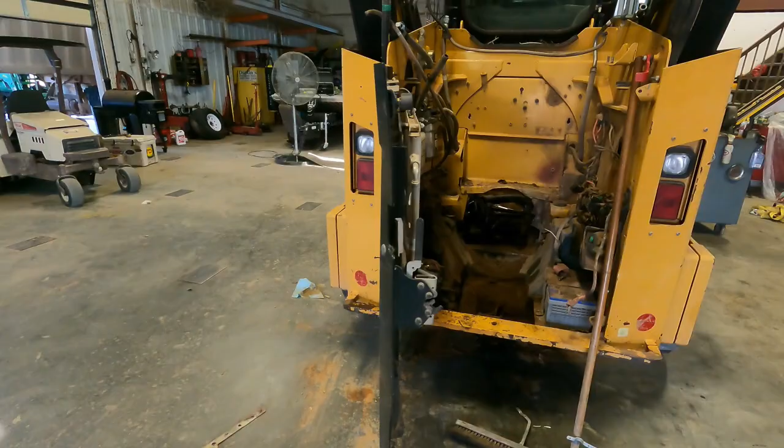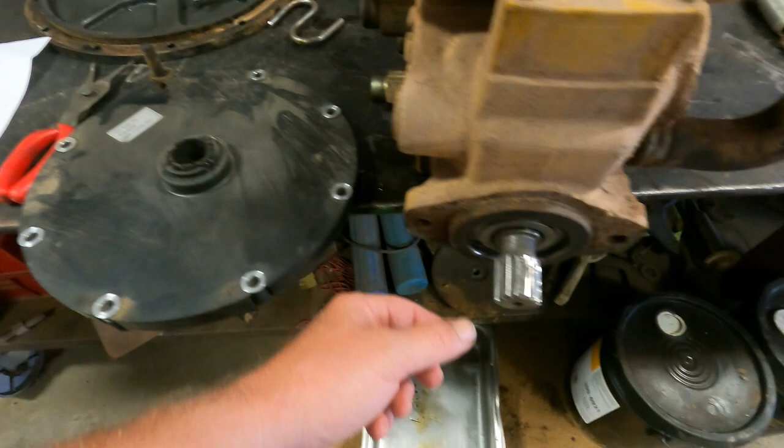So I'm out here in the shop. I guess you can see the video is hydro coupler part 2. I'm out here and we've got it completely tore apart this time. The same shenanigans. Center's broke. This wore quite a bit more than what it was the first time. So we'll just start at the beginning.

Machine breaks, I get it home, order the part, I call him, tell him what it is, the guy finds it, he's like, it's $900, there's a 60 to 75 day national back order. I'm like, I don't remember it being $900 the first time I done it, it was like $200 or $300. So anyways, 2 weeks goes by. Another parts guy calls me, and apparently the first guy ordered the flywheel, not the flex plate. So luckily, that is less than $200, and they had it here in 2 days.

So I bring the machine in and tear it apart, and then see the input shaft like that. And I was thinking about trading it in or selling it, but you can't get nothing out of it until you get it running, because them pumps are so expensive. And I could put a coupler on it, and then somebody in 100 hours is going to break again, and they're right back where I am. So I didn't really want to do that either. So anyway, I tear it apart, get it out, and decide I'm just going to put a pump on it.

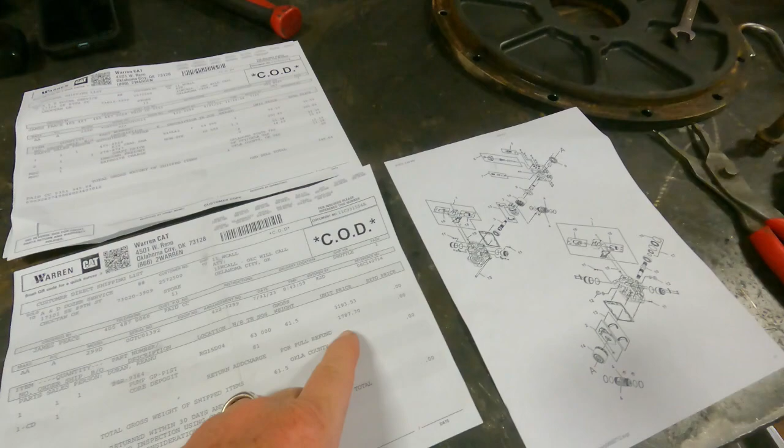Call, they tell me it's $3,200 for the pump. I got it right here. $3,200 for the pump, $1,800 for the core. And I was like, well, how much is the input shaft? And they said the input shaft was like $600. And then I figured the bearings, $400 or whatever, so $1,000. So at that time, it really wasn't worth $2,000 for me to tear this pump apart and try to replace it and then put it all back together and something not work.

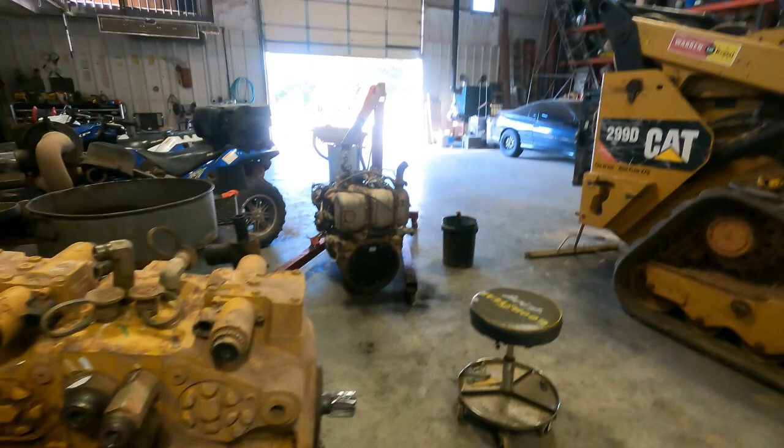Because I thought this pump is considered all one piece. Like this shaft would run all the way through it and all the way to the back, because of the way it looks like it goes in there. And I was assuming, and that's what you should not do. So they ordered the pump. This was Friday. Today's Tuesday. So it comes in today. I go up there to pick it up. Well, that $3,200 buys you from here to here, this pump.

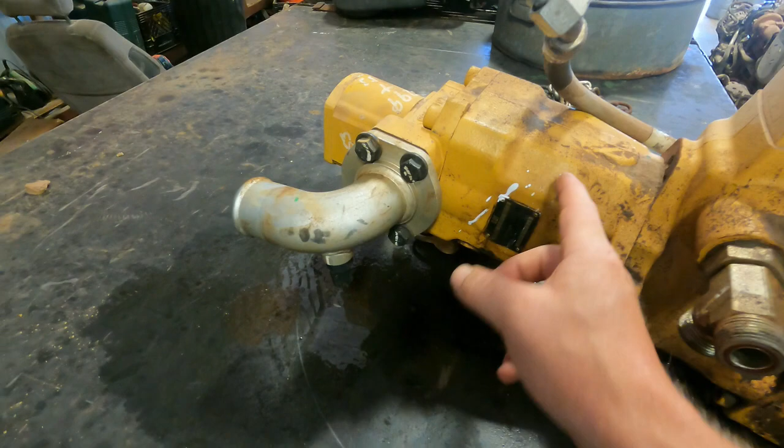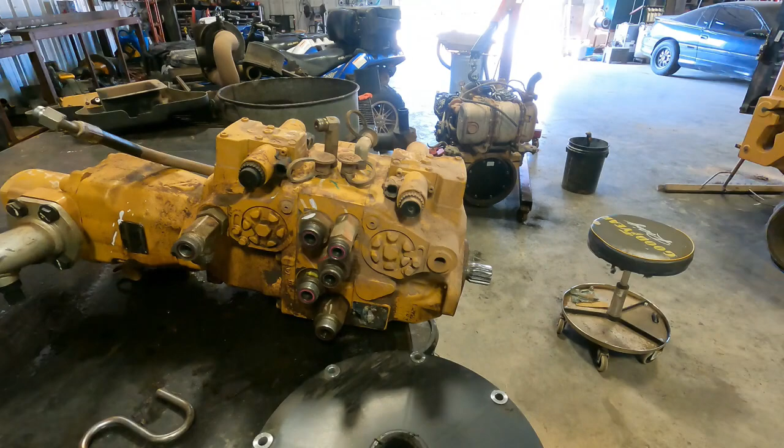So this is actually called the piston pump, and this one's called the hydrostat pump. So refund my money on that. Well, the front pump is like $6,500 with a $3,000 core. And I'm like, you know what? Give me a breakdown of this pump and let's see how far the shaft goes. So then he gives me this breakdown. Hopefully you can see a bunch of this.

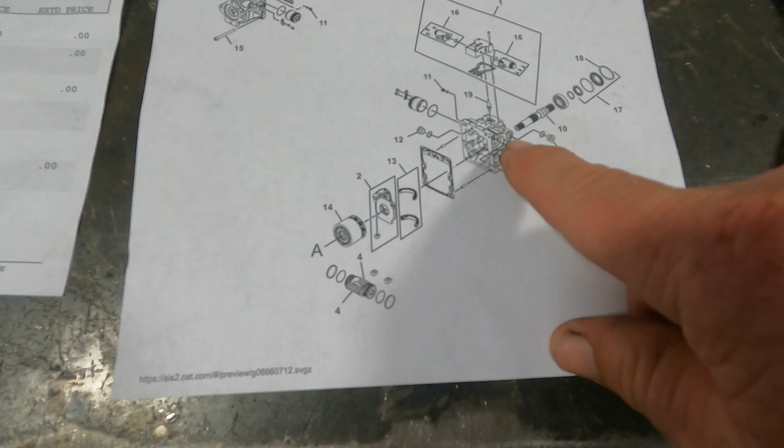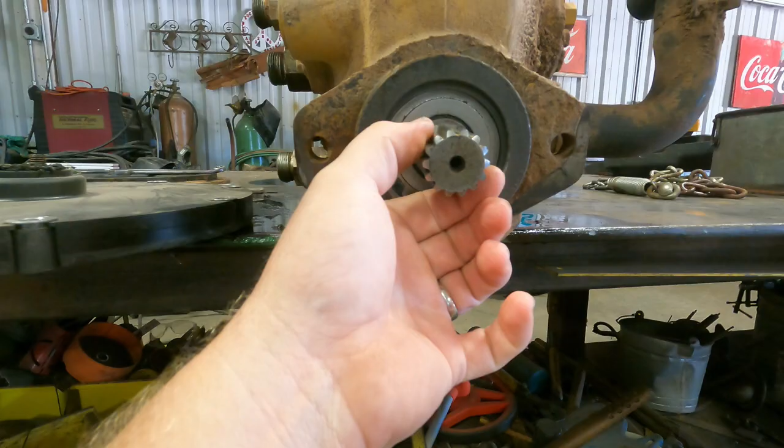So this is the snap ring, seal, spacer probably, I don't know what that is. Another seal, set of bearings, and then there's your input shaft. And then the input shaft runs through this first block, set of gaskets, another set of bearings. I forget what he calls this, but this may or may not have a clip in it, I'm hoping, and another set of bearings. So what I'm hoping is I can pull this snap ring out and this input shaft will slide out. Kind of like a camshaft or something, but I don't know.

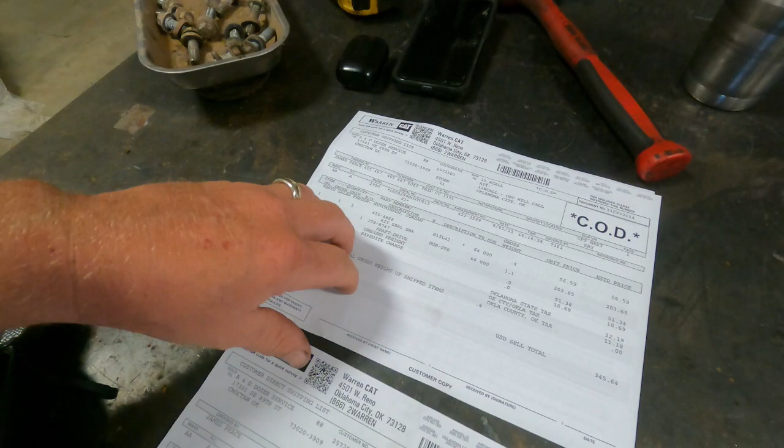We're fixing to see. Worst case scenario, it's still going to be a core if I can't get it out of there. But the input shaft is $203, and the seal kit number 17 was 60 bucks, so $345. So I'm gonna go ahead and take this apart and see if I can get it.

Now, the other reason I'm making this video is the whole reason this even started, because I was pretty disappointed in this whole plastic flywheel, not getting that many hours out of it. The first time I didn't have the bell housing off of it, right? So that parts guy that figured out that they sold me the wrong deal, I think he was a mechanic, because he knew exactly what I was talking about, and he kept saying, you got to take them 2 bolts out to get that pump out of there. You don't have to take them 12 bolts out of that bell housing.

I'm like, I don't know what 2 bolts you're talking about. Well, you can't see them. They're right here. And by the time this is in here, you can't get even an extension on it. This side you might be able to, but with all these hoses and everything on here, this side you can't for sure. Like there's no way.

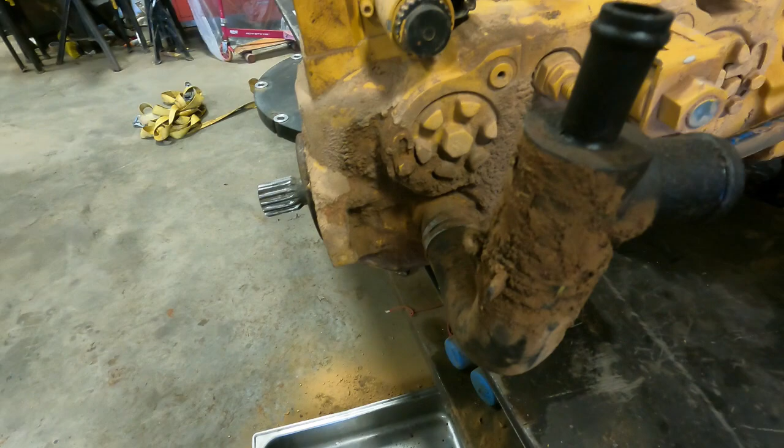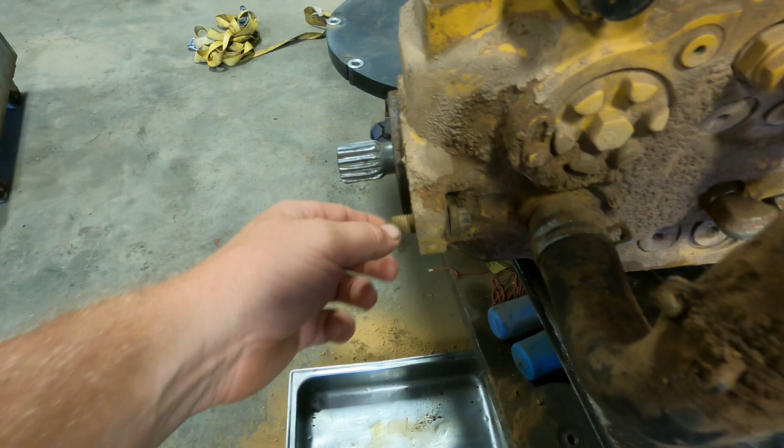They make a special tool that slides down through here and it's got a closed-in crow's foot on it. And these are torqued to 120 foot-pounds. And these right here are torqued to, I think, 50. I think it's like 45 plus 6 or whatever, so I torqued them at 50 and I used Loctite.

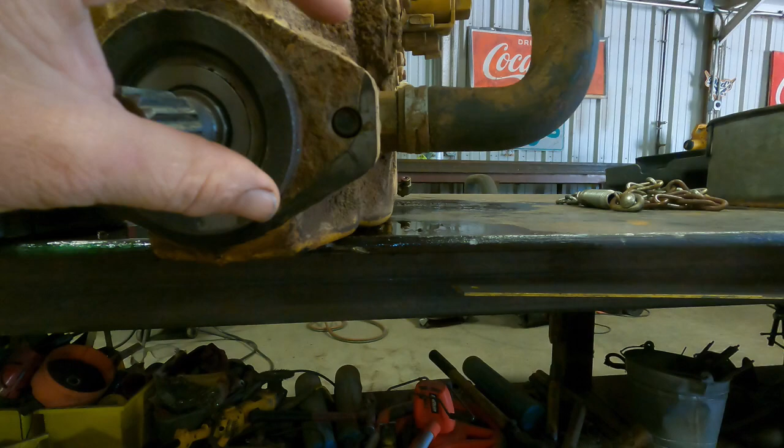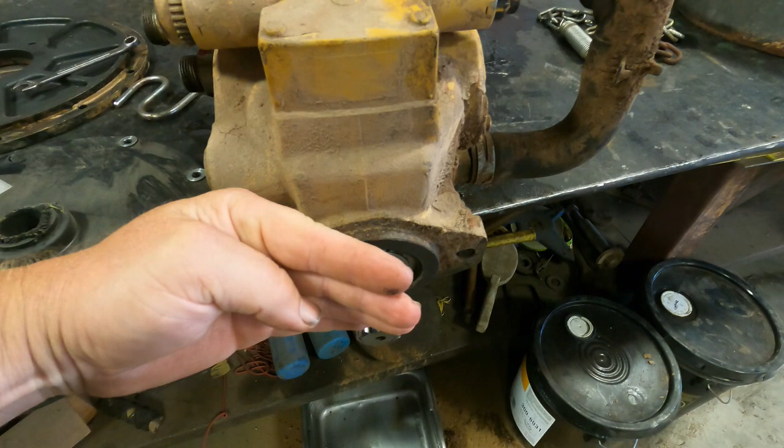But anyways, the piece of that mud flap that goes in between this and the motor, when they did it from the factory, or if they had a pump problem and pulled it, whatever happened, because it was a rental when I bought it, so Cat worked on it until I got it. It had been there that long, and you can see that it's pushed it about 1/8 of an inch out of square, and that's what was wearing these out.

Because that's when the parts guy called me and said that $900 was the flywheel. When we was talking, I think he used to be a mechanic, because he was saying if you don't get them lined up, they won't last no time. And I was thinking, well, maybe them bell housing bolts are loose, because you can't really see them. I didn't look at it. I parked it out back and didn't touch it because I knew the parts wasn't here.

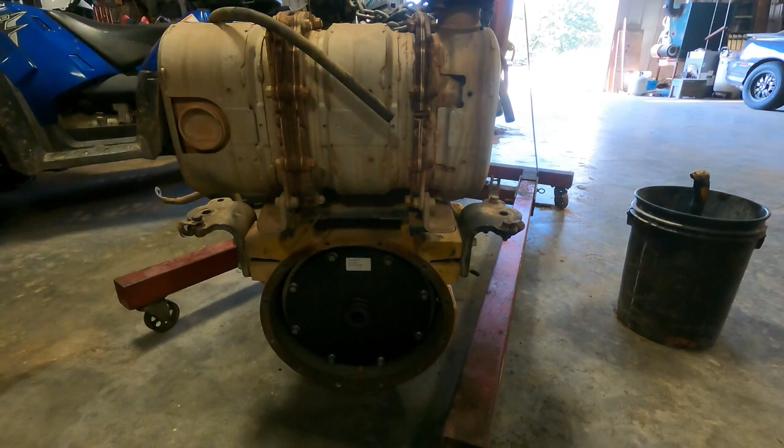So when I took it apart, I made sure there was nothing loose, so that wasn't the case. And a side note, if you do these, that's a machine press fit bell housing that goes up in here. And I didn't catch it, but when that fell down last time and got dirt all in it, I didn't clean it out. And I like to never got these things apart this time. I even went back and watched the video, because I don't remember it being that big of a problem. But this is the bottom, and it's got dirt in it.

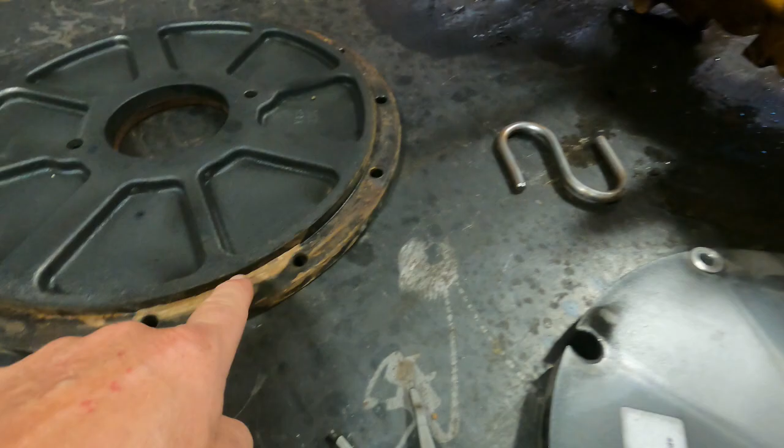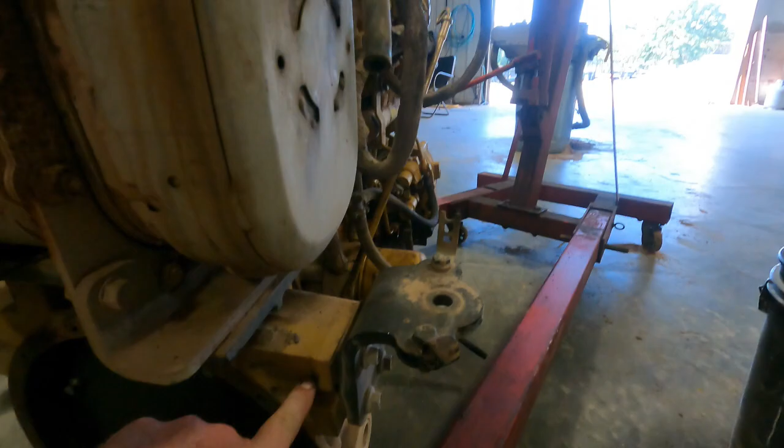So this had dirt in it, and when I matched it up and tightened it up, I had a ratchet strap on the front, and then I brought the tractor in here and had a ratchet strap on the motor trying to pull them apart. And then I had a tire bead breaker tool with like a 4-pound sledgehammer you slide back and forth. So I was putting that on the back of the block right here. Well, the paint's gone, and basically beating on it with a 4-pound hammer. I did that 20-30 times, and it finally cracked loose. So you definitely want to make sure that's clean.

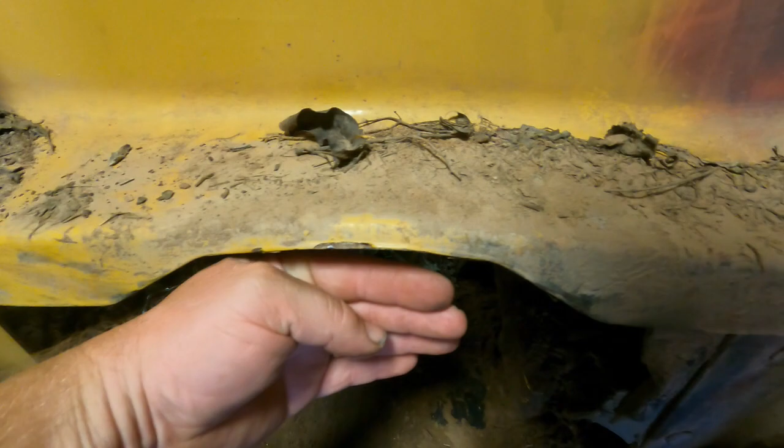But also, if you're taking this apart and your coupler's bad, it's really hard to see because this bell housing is like right here. When you pull the motor out, the bell housing is flush back in here, so you really can't, because this is that piece of rubber that was stuck in there. So it's really hard to see where them 2 bolts go, to make sure that nothing is in between there, or them bolts are loose, because if them bolts are loose, it'll do the same thing. So that's super important.

I don't know if anybody's made any videos on this since I made that one, but I'm going to try to link them together, because if I'd have known that before, I definitely would have checked that and caught it then. I wouldn't be doing this again, especially if all I got to do is snap this ring out, because the pump's not bad. You're talking $6,000 for that pump. If I can get this input shaft out that easy, that's huge. That'd save you a lot of money. So I'm gonna get my snap ring pliers, get all my tools out, and see how hard this comes out.

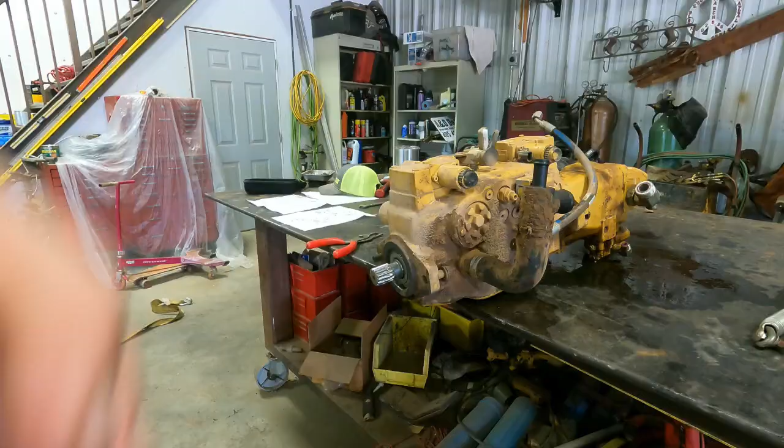Another interesting point is, if this does come out of here, you don't even have to take the pump out of the machine. As long as these bolts are tight and there's nothing in there, you could leave the pump in the machine and do this with just taking the motor out. The other reason I want to make a video on this is I've had quite a few comments asking about torque specs, and if I really thought it was easier to pull the motor than take this pump out. And yes, I'm still not looking forward to putting it back in there.

Gotta go find another tool. So I got my tools here. Because them hoses are gonna be really hard to hook up. I'm not looking forward to trying to do that at all. And the other deal is, I took a siphoning hose and siphoned out all the hydraulic oil I could out of that tank, and I probably still lost 3 or 4 gallons.

Of course, you know it's just not gonna fall out of there. Oh, it's moving. Oh, there it is. I don't believe that. Oh boy. No way. I can't believe it. There you have it, folks.

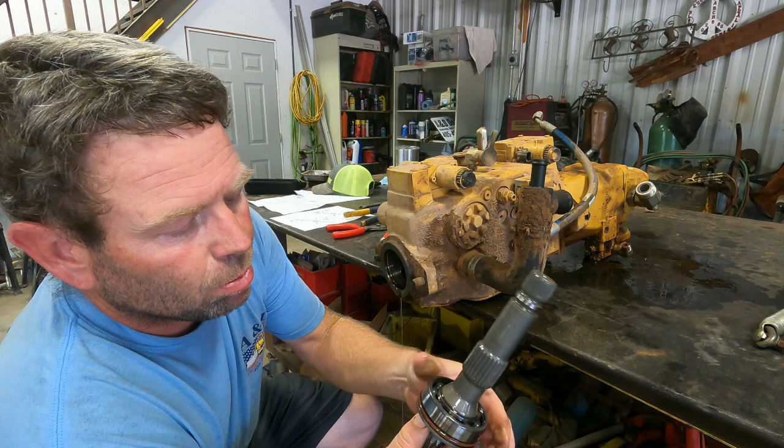I was wondering about this bearing. It is pressed on there though. So I'll probably have to order a bearing. Maybe I can get that off there. So I'll lay all this out and start it back over.

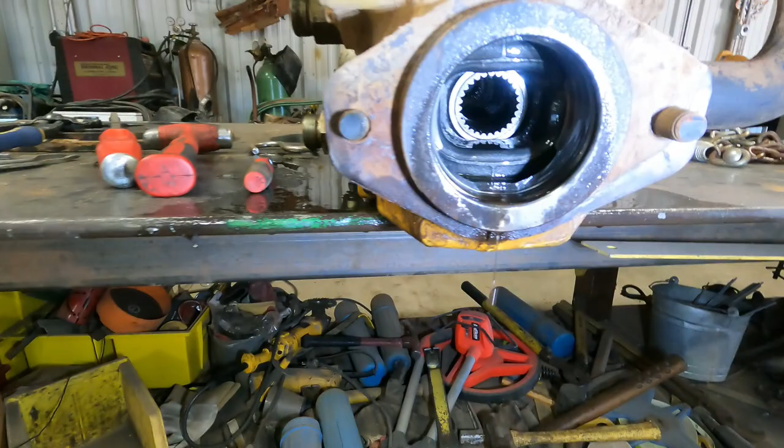Look like something that'd eat you. A largemouth bass with a funky set of teeth. I can't believe that fell out of there like that.

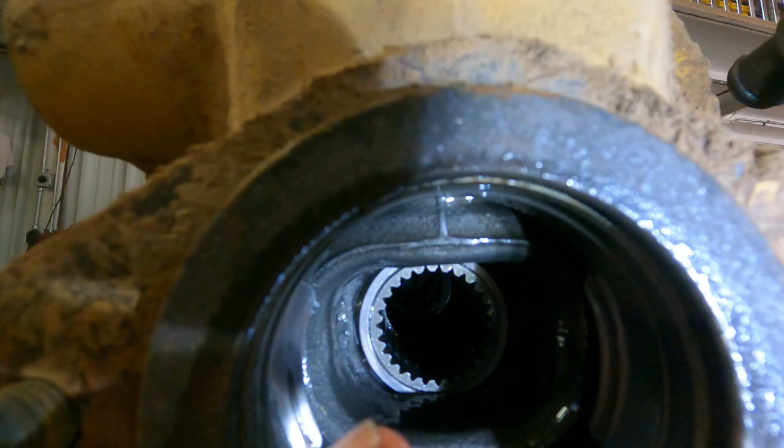I was afraid that was going to be a Timken bearing, but they're ball bearings. And I guess this machine, it's kind of hard to see it, but that little lip right there is what holds it all in there. Man, that's tiny. Whatever you do, don't beat on that.

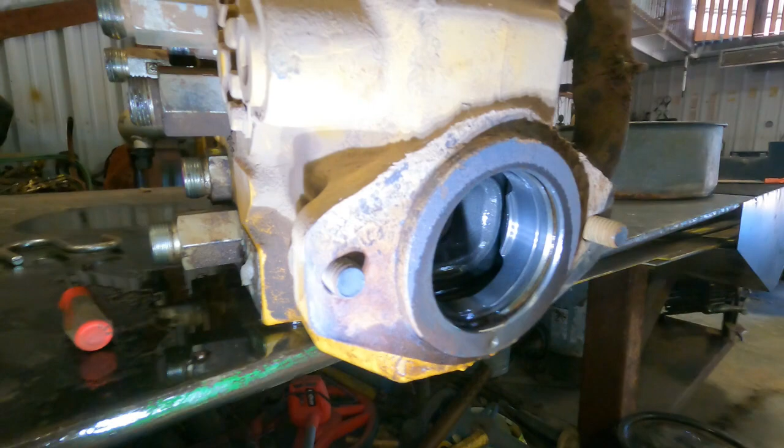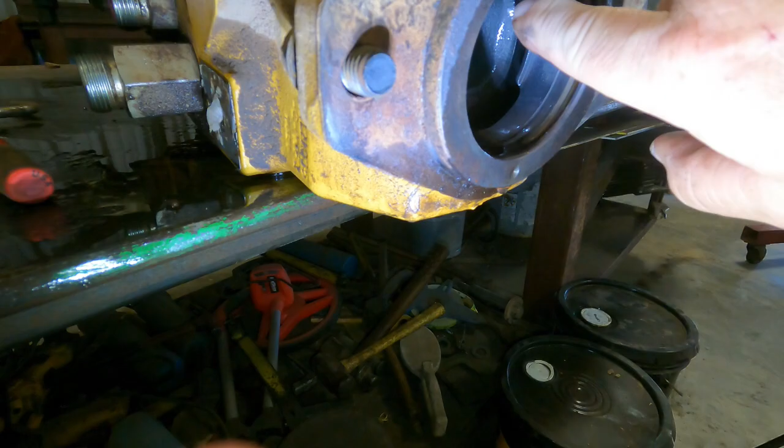Man, that's hard to hold all this at the same time. It rides on this right here. Maybe it bottoms out in there too. I really hope it does, but man, that is so small. All right, dodged a bullet. Like a $6,500 one. So this is it.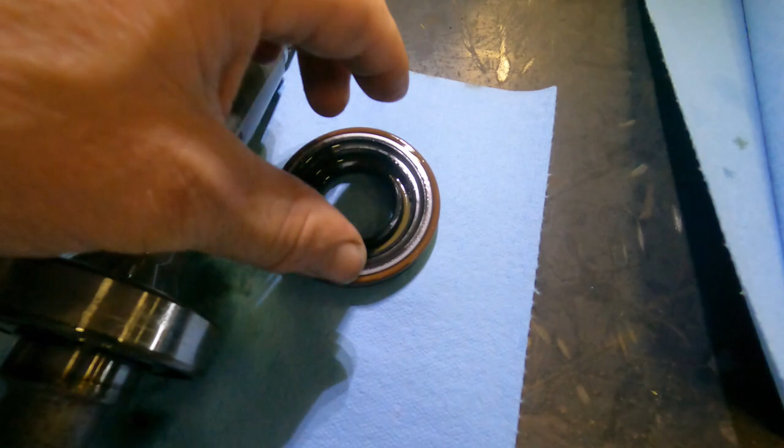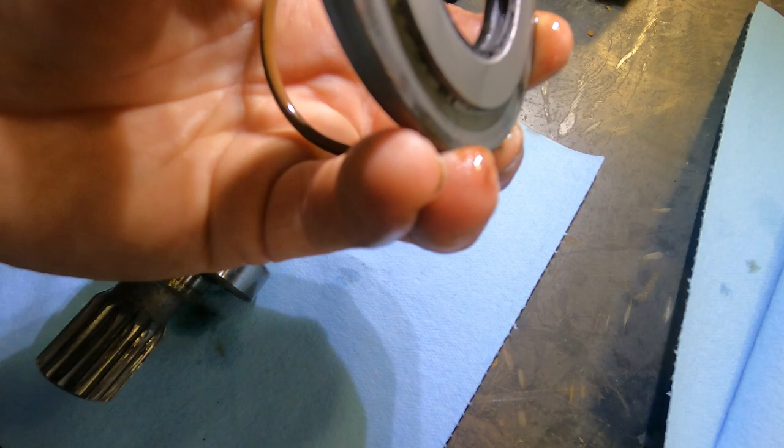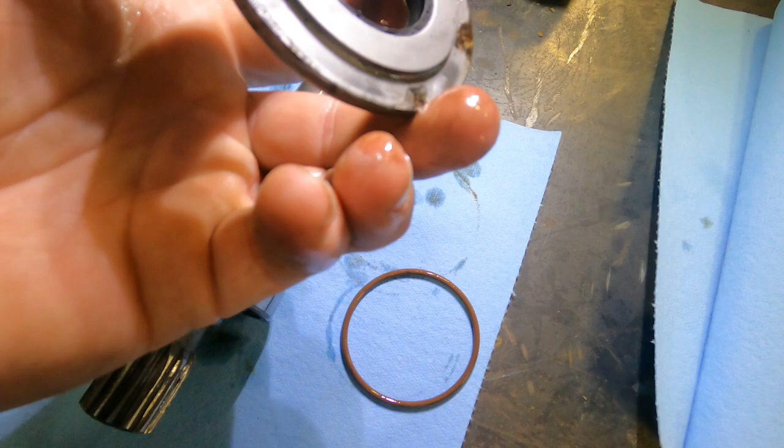So I'm not gonna take any of this apart until I get the rest of my seal kit. That way I put everything back together like it was. You know, it's real easy to look at now, but this comes out, that's backwards, I think. Normally, like a wheel bearing seal, this would go out that way, but yeah. Or maybe this is part of the kit.

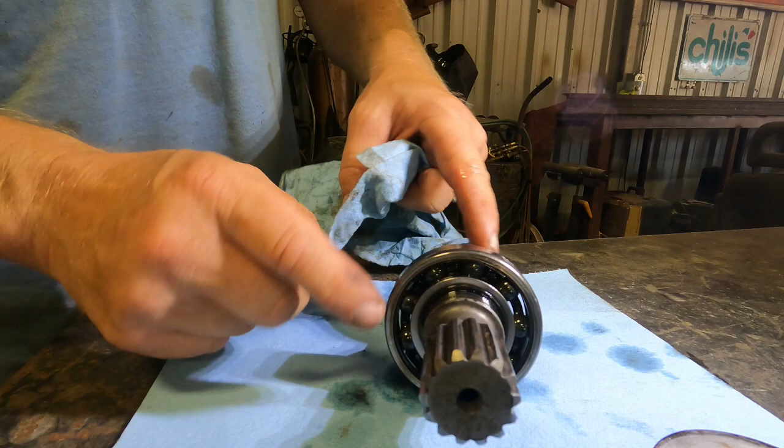So these are just ball bearings, and it's not even pressed on. It's got another clip. I was afraid this was going to be like a set of Timken bearings, and the race would be inside the pump, and this whole thing wouldn't come out, and maybe this end was bigger and it wouldn't fit through there. But it looks like I dodged a serious bullet, because that's what that clip is right there.

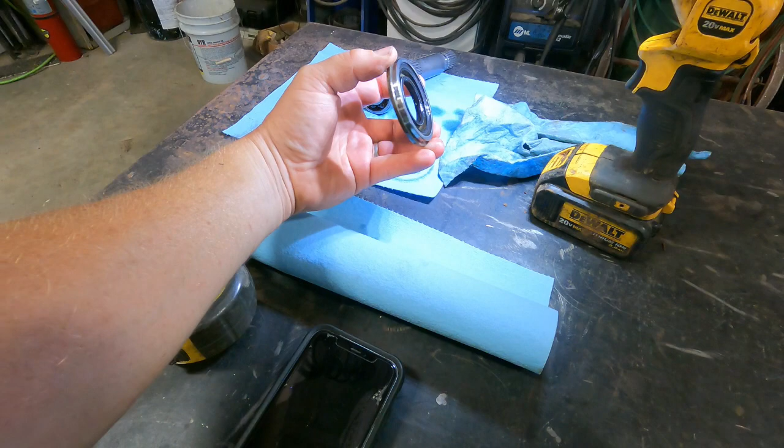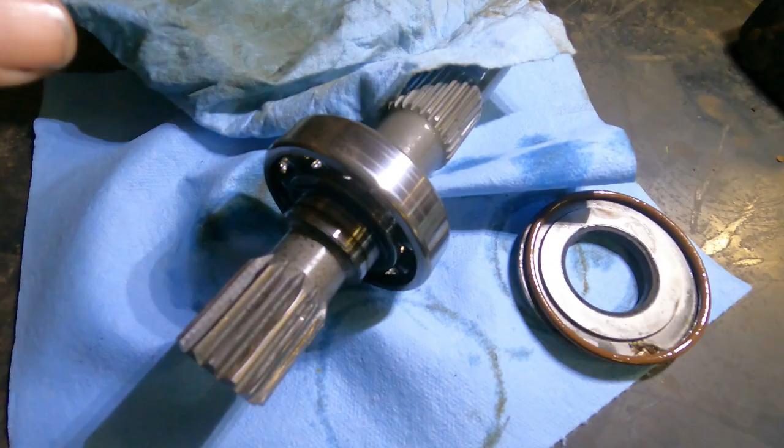And I seen that. And so basically, this whole thing is all going to be new. That kit, that $60 kit, I don't even have to drive nothing out. I get that, this, and new bearing, new clip. So I'll get all them pieces new for 60 bucks. So that's sweet. The bearing looks fine. I can't believe I don't have a race in there, because what would keep that from spinning?

So anyways, I'll wait till the parts, they're supposed to overnight them. I should have them tomorrow. And then I'm going to put it back together and see if I notice anything else before I put this video out. But I'll put it all back together, bolt the bell housing up, get it mated up to the motor, and then stab it back in there.

But one thing I did forget is that rubber mud flap deal in there. It is hard. It's a pain, and it has some bolts. The first time I did it, I didn't see how they ever got it in and out of there, but that's how the factory does it. They undo them 2 bolts, the bell housing comes out with the motor, and that flap is in between the bell housing and the front of that pump. And I'm assuming they do it for heat and probably noise.

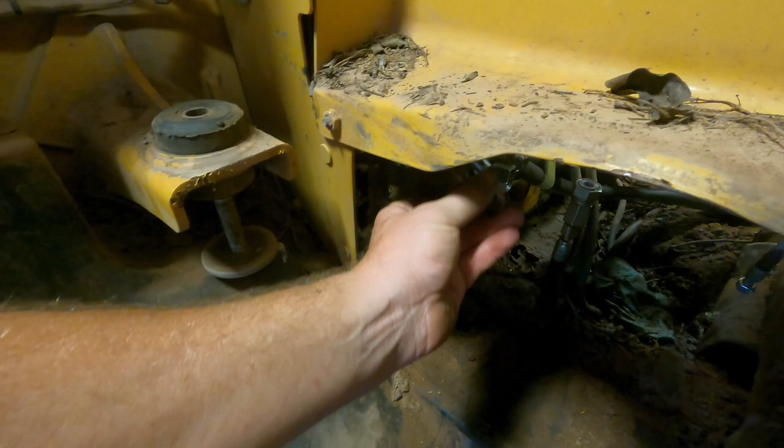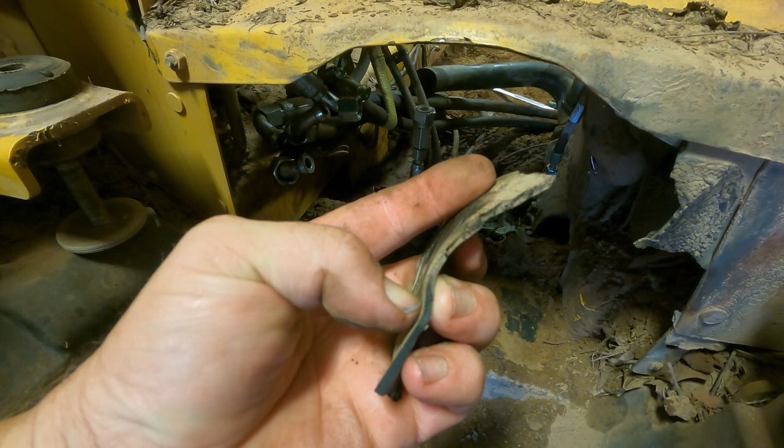Because this is one side of the bracket that I took off, and it goes right here, and it's literally a mud flap. That's all it is. It's a little old mud flap. 3/16, 1/8 inch, whatever it is. But if you don't have that special tool, you won't be putting it back in there, I promise you. Because it's just too many headaches. So we'll see if we get our parts tomorrow. And like I say, we dodged a bullet on this one.

And if you don't know, you should check rental prices. I about fell over when this broke. I was out on a job. I had to rent a machine. It was like $650 for 1 day for a 289. I thought it was $200 or $300.

So keep that in mind on your pricing and whatnot. That was a real eye opener for me. You tell these people, they want you to come out there and do a job. They want you to drive to their house, load the machine up, leave your house, go to theirs, unload it, work for 2 hours, and they expect to pay a couple $100. Like, you know what? Go rent a machine, you go pick it up, take it and use it, you know what I mean. And then you get to work on them on top of that. So, anyways, I'll get everything cleaned up, and when the parts come in tomorrow, I'll put it all back together, and we'll see how it goes.

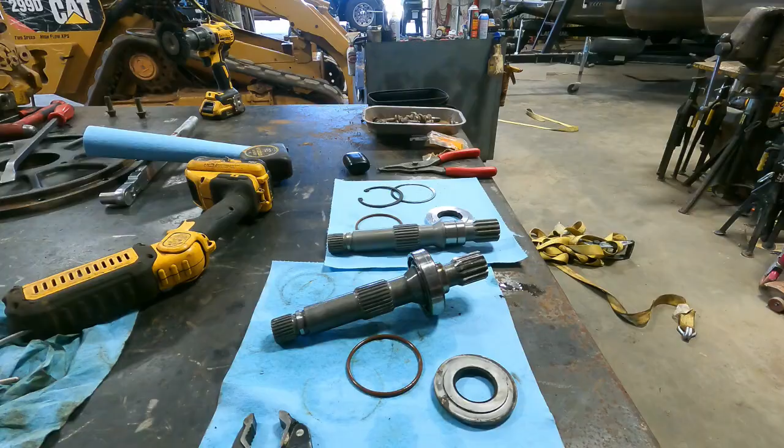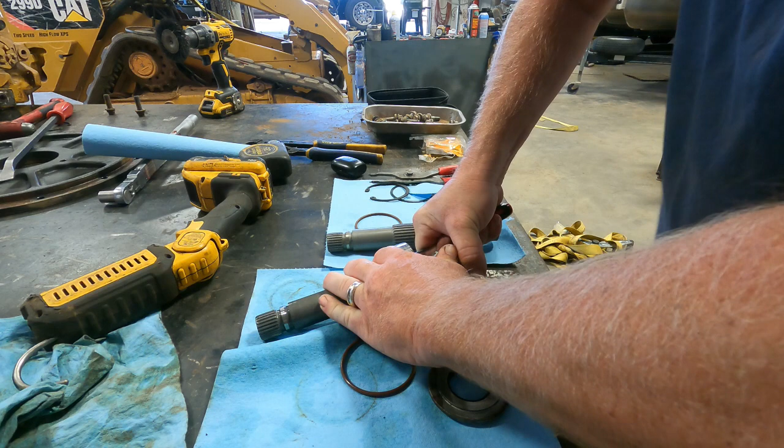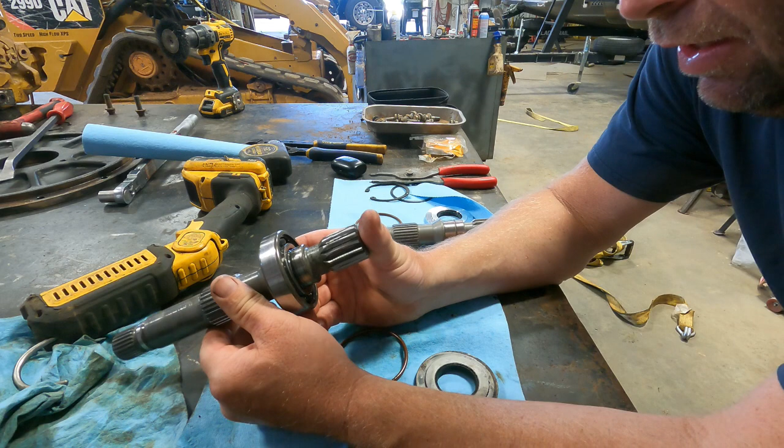So I got my parts back. It's like 1 o'clock, 12:30, something like that. It looks like this is going to be just super easy. Hopefully. Probably the wrong size pliers. Oh, it is pressed on there. Now I wish I'd have bought the bearing. Well, it is pressed on there, so I'm gonna put it in a vise and see how tight it is.

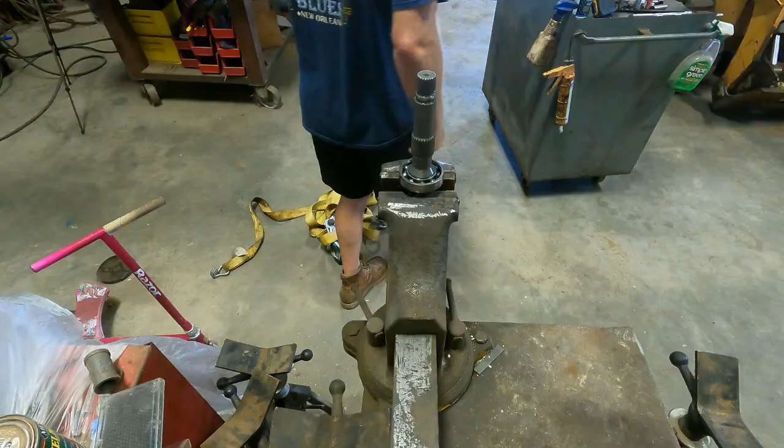So this is a dull chisel. I got it in the vise. I'm gonna start off. I'm just barely hitting it, it's moving, so it's not a super tight tolerance. Usually 2 to 3 thousandths on a press fit. And it's coming right off.

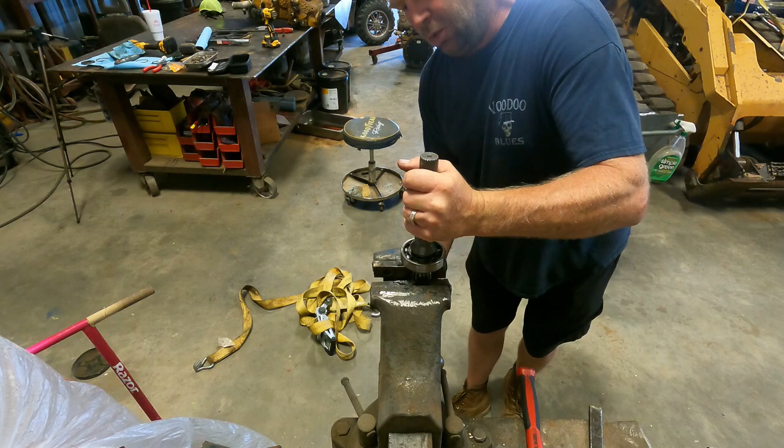I might be able to use a socket or a punch. The splines are already messed up, so I'm just going to clamp it on there. This ain't going to matter. If I wasn't recording, I'd just put it on the table. It's just a little hammer. I'm not wailing on it. And I did mark the bearing with some paint, so I know kind of which way it goes back on here. Just like this. A little oil on it.

That's probably not the best. I'll get a socket real quick and then put it back in there. All right, so I cleaned it up. It felt like I had a bad spot in it. There's a piece of trash. I thought I was gonna have to stop, but I cleaned it out with brake cleaner and blowed it out. And now it's fine. So either a piece of this fell down in there or something.

This is a 1.5 inch deep socket. I don't know if it's going to go all the way before I hit the splines. Ooh, that's close. You can probably just use a regular chisel. And you can tell when it's all the way down because of the way it vibrates the hammer back. There's something in there now. You can hear it and feel it. Like a brake cleaner in your eye. There. So all the trash is out of it, we're good to go.

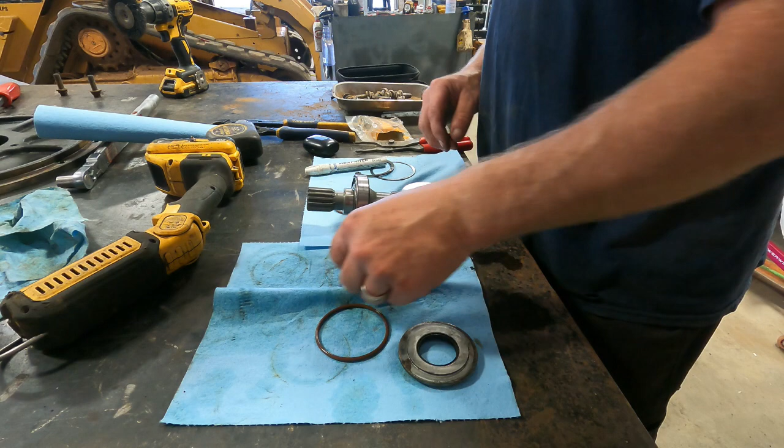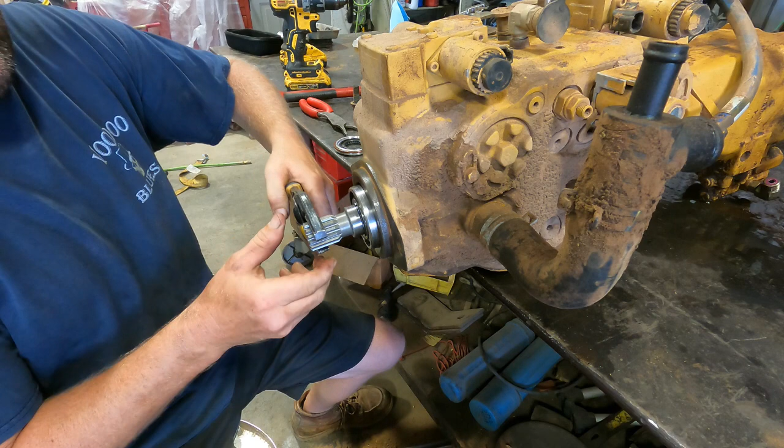That's it. And I'll take a little hydraulic oil and put it around this O-ring and this seal and the inside. It don't get any easier than that. And you don't even have to have a real fancy pair of snap ring pliers to do this job. So I will hand it to the designers on that one.

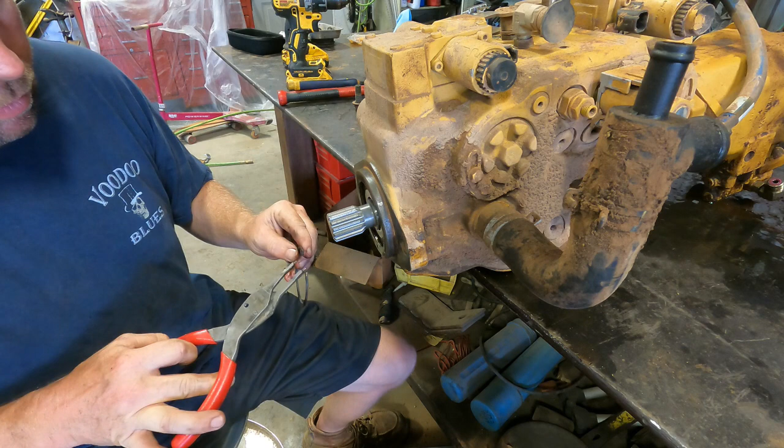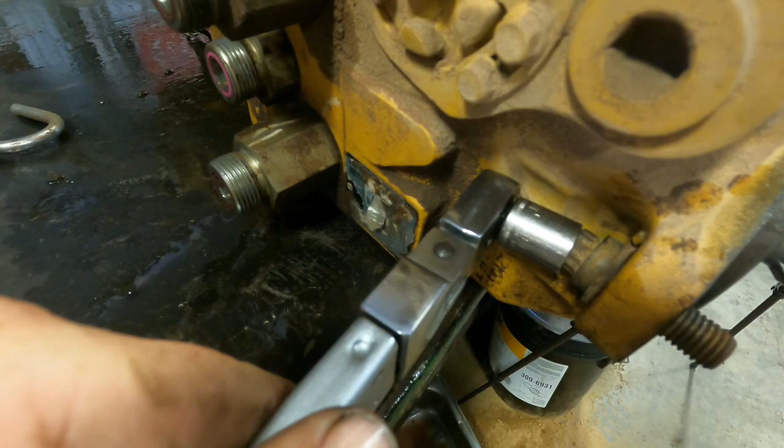I went looking at some skid steers today, and I don't know if I'm gonna keep this or what I'm gonna do. So I cleaned these bolts up, and what I'm gonna do is run Loctite on there. I'm gonna put a wrench on it and beat on it with a 4-pound hammer. Because this right here is a 3/8 drive torque wrench, and you cannot get it on here. Right, so I'll go grab one of them cheap extensions, but I think you'd probably break it at 120 pounds anyways. So anyways, I'm gonna put some Loctite on there, match it up, and beat on it with a hammer, I guess. Sounds like a plan to me.

And then use a wire wheel, and I already cleaned all this up really good. And then I'll do the same to this bell housing and inside there, and match it up, and I'll see how it balances with this hanging off the back of it, and then that'll probably be the end of this video because I'm basically just putting it back together. So we'll see what happens.

So I got it stabbed in there. I had my boy help me do it. It wasn't that bad. It's pretty balanced with the chain towards the exhaust. There's 2 picking eyes on that motor. It would have been easier if I'd have had the little crank screw thing that you can adjust while you're using it, but you know, we're poor, so we just pick a link and go with it. Everything in here went back.

It looks like these hoses aren't going to be that bad. The hardest thing to unhook is back there, and I left this line on there, but the rest of this should go back together pretty easy. Like I say, them bolts in the bell housing, right there's one of them. You can get to this side, but by the time I get all this hooked up, you can't even see that one.

So it's like 3:15, it's like 105 degrees. So I'm just gonna put this thing back together and hopefully get this video out tonight, maybe. We'll come back after I get it running. 3:45, 3:15 when I started. It took me 30 minutes. It's in here. All the lines are hooked up. The only thing I got left to do is some zip ties.

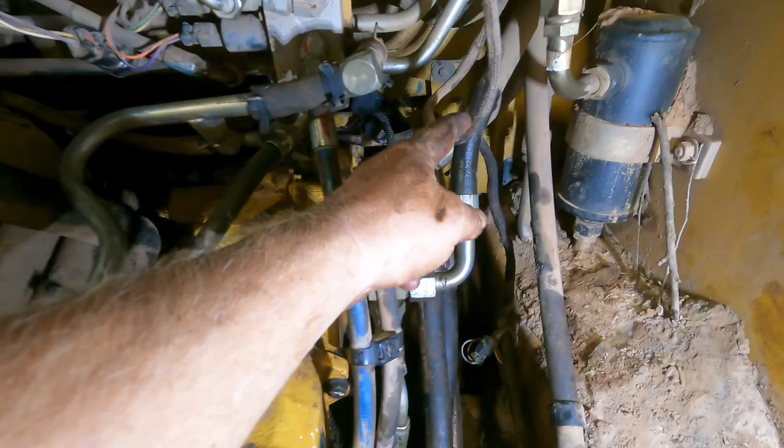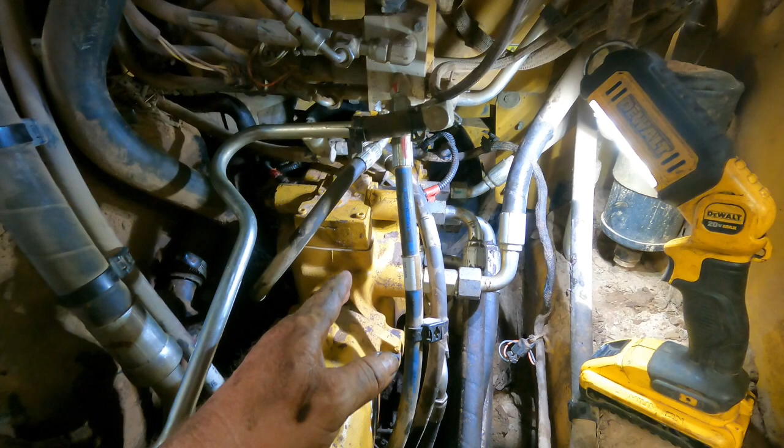I think that's it. Somebody was asking me if they thought it'd be easier to pull the pump out. I still don't, because the balance point is way back in here. On this pump, when we took it out, we put a chain over in here. Can you see? Yeah, right there. So even if you had a cherry picker in here, you couldn't get it down far enough. You'd have to drag it back. I think you'd have a really hard time trying to stab it. If you wanted to manhandle it, I guess you could try. But all these hoses are really in the way.

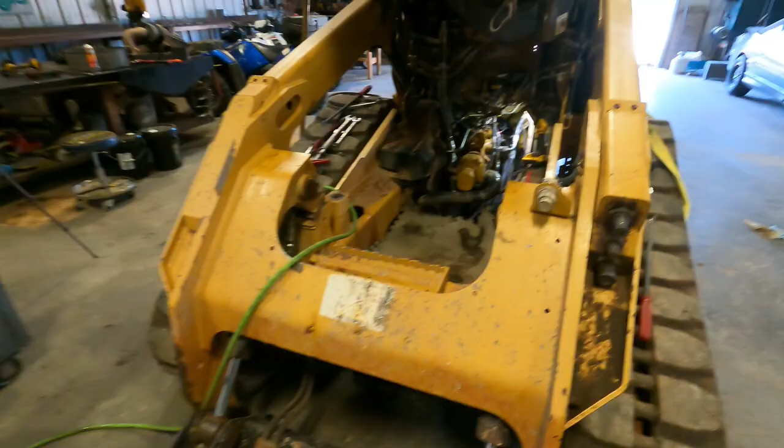But if you knew the pump was bad, I would probably pull it out this way, and before I pulled it, put some lumber or something under there and go that route. But that's it. So probably take me another hour, 2 hours to get everything else back in here and buttoned up. So get back to work.

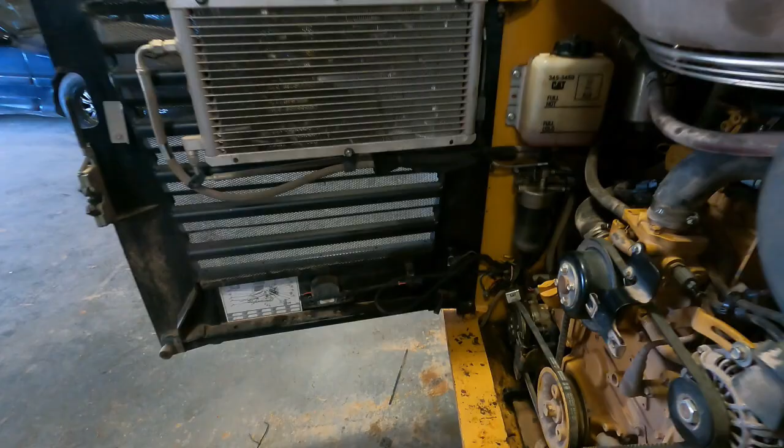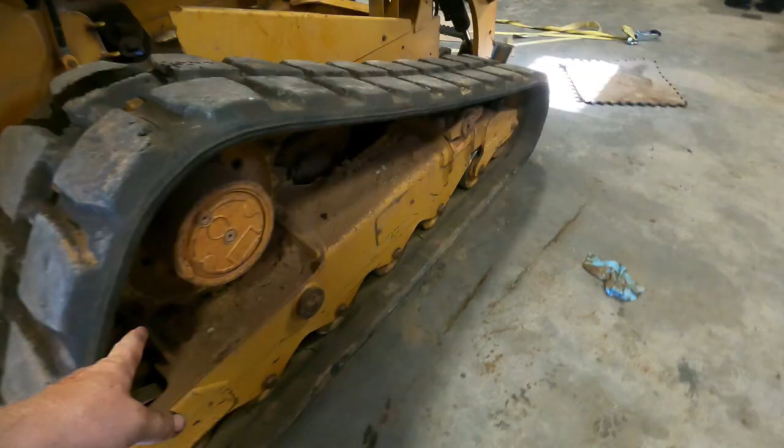5:30 and it's hot still. I got everything zip tied up. Take my mat out of here. Full of hydraulic oil. Motor's full of antifreeze. I left the top off because I'm gonna power wash it real good once I back it out of here. I haven't put the bolts in the sprocket yet because I'm by myself. I have to go in the house and get my son. Let's see if we can pick this cab up.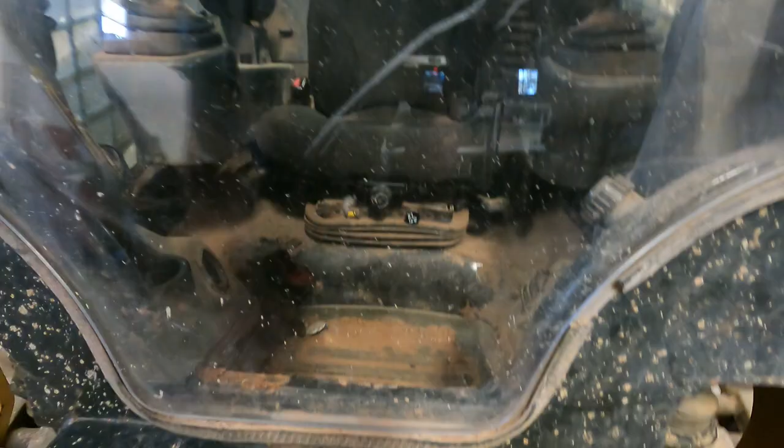Oh yeah. Let's see if it'll start. I think last time I done this, it didn't start because I forgot the ground. I didn't forget the ground this time. Oh, we got power. That's good. Come on, what are we doing? Nope, can't show you that. That's the good stuff.

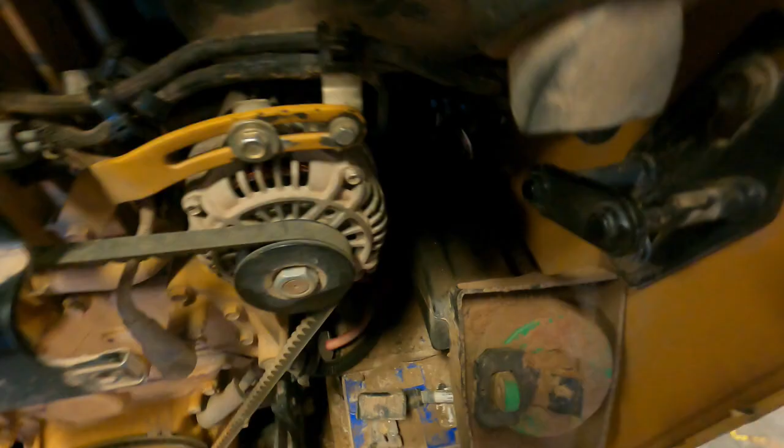One solenoid. Maybe one of that yellow light, that's why it was flashing. Right there, right here. Okay. That's cool, it wouldn't even start. Oh, it tells it what to come on and off. Sweet. Now what? Oh. Starter relay. Starter switch. Yeah, it's gonna take me a minute to find that one. Those are a lot easier to hook up when their box ain't on there.

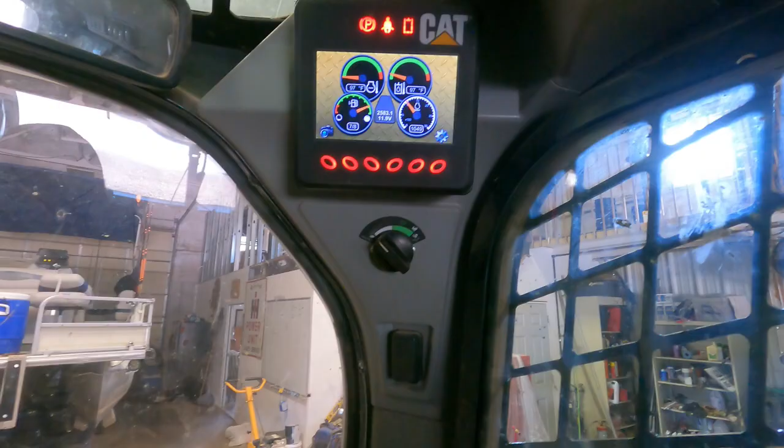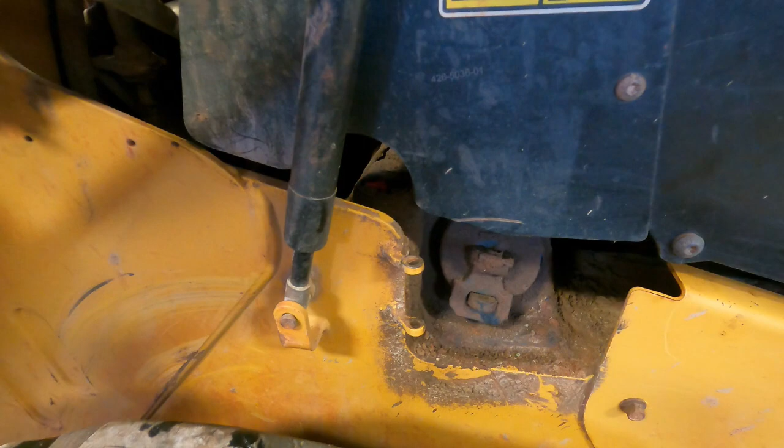Ooh. Okay, third time's a charm. Here we go. Let's see what it does this time. Hopefully nothing's spraying. Contact. Oh, she's growling. Fans running. That sucked the bottom out of that hydraulic oil. Well, it's alive.

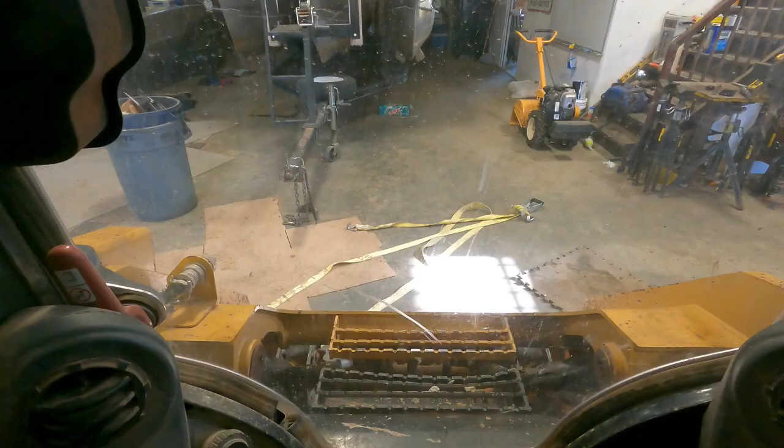I don't see no leaks, but I'm going to top it off because it's below the red, so we'll see how much more it needs. It's still below red. Only had a gallon. Yeah, it's low. I can hear it growling. So, anyways, it's working. I got to load the dozer up and go do the job tomorrow, so I'll send my wife to get some hydraulic oil, top it off tomorrow, and then probably take it for a spin. But I want to call this video a wrap.

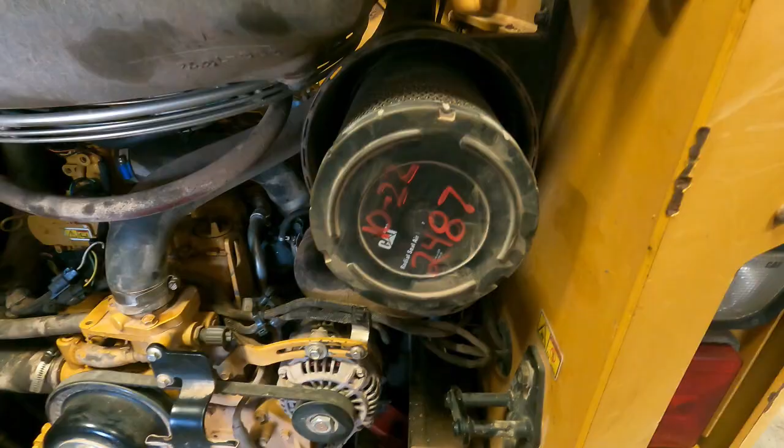It's got 2,500 hours on it right now. I looked back a year ago. Let me check that real quick. Come on, what did I just say, 2,500? 2,583. And it was almost exactly a year ago. So I'll look and see where my oil changes was a year ago. So the last time I changed oil was 10/22. It had 2,487 hours. So I think that video I made was almost a year ago. So it had maybe 2,200. So I got maybe 300 hours out of that flywheel with it being that bad.

So anyways, hopefully this video helps you out. I'm gonna get me some more hydraulic oil, finish it up tomorrow, and go brush hogging and give it a test run around here. But it should be good to go for another 1,500, 2,000 hours. I don't think I'll ever have any problems out of it. It's a good thing because them new Cats are like 96,000. So we'll try to get some more hours out of them.